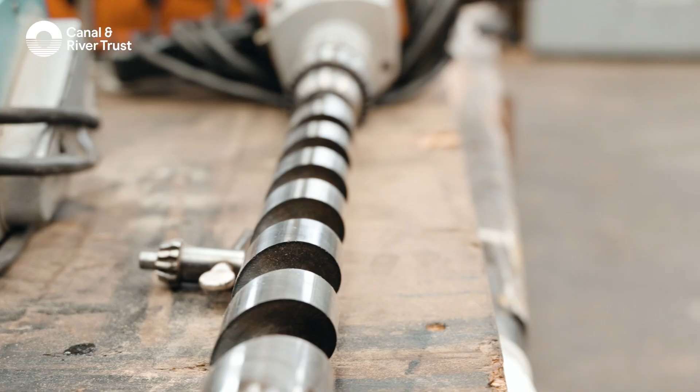Hello, I'm Simon Turner. I'm the National Workshop Manager for Canal & River Trust. I'd like to welcome you to Bradley Workshop here in the West Midlands. This is one of the two sites that we have where we make lock gates for the Canal & River Trust, with the other one being Stanley Ferry in Wakefield in Yorkshire. What I'd like to do is take you through a tour of how lock gates are made, the processes, the tools, the equipment and everything else involved.

So every year the Canal & River Trust will change up to 150 lock gate leaves. That process will start 18 months in advance, where we identify which gates need to be changed. The next steps will be lock gate technicians will go out to each site and take measurements and surveys of those lock gates to understand requirements.

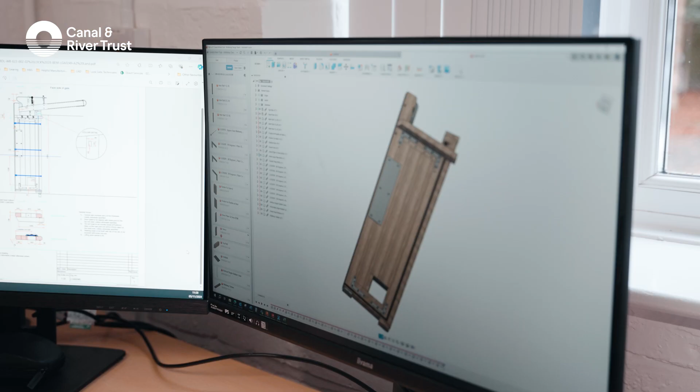After that, they'll be transferred into the drawing department, where accurate detailed plans are produced, which allows the gates to be made. Once that has happened, we produce a cutting list. The cutting list is of the timber that is required to make the gates. So we'll take you through now and show you that process.

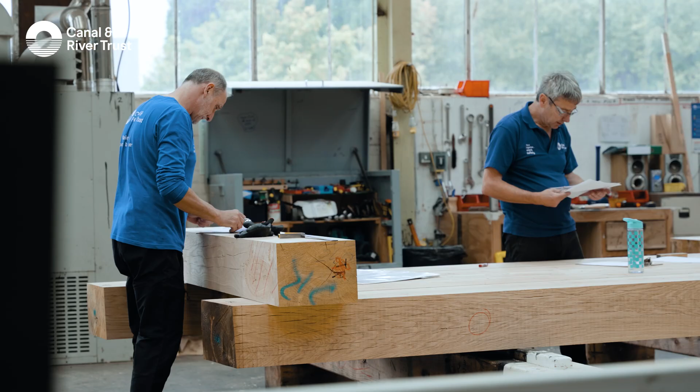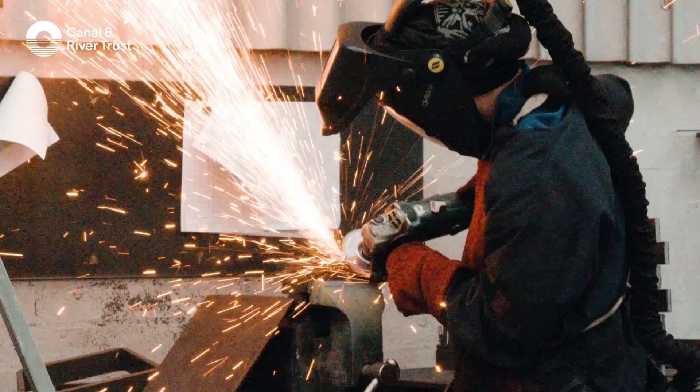So the first step of the process, really the most important part, is us carrying out and doing the surveys of the lock gates. Now the purpose of that is for us to check measurements against existing drawings, but things have changed over 25 to 30 years. So we don't just want to rely on that old drawing, we want to go and check on site. So they'll use the drawing, they'll use how the gate sits, and they will take new measurements to come up with a survey. As you can see, it's quite technical.

The tools that they'll use to do this are really basic, and the reason we do it this way is it reduces, first of all, the cost of dewatering the lock, but also the impact on our customers. So if you can imagine, to do it in the dry, we'd have to dewater the lock, huge cost, a whole set of stoppages. We'd be doubling the stoppages that we'd need to carry out.

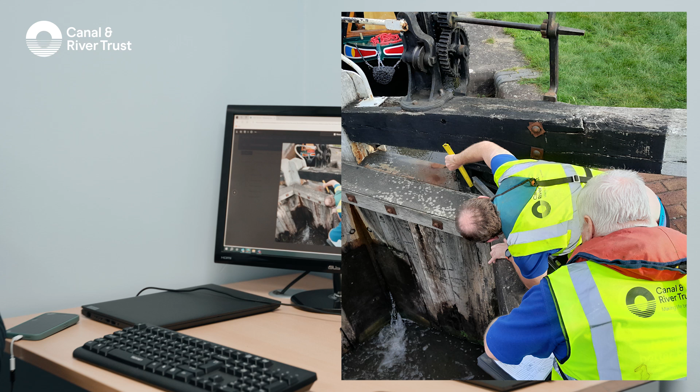So all in all, we have to take over 30 separate measurements for each lock gate leaf. That would include the collar hole, the length of the balance beam, the angle of the mitre gates, lots and lots of different measurements that are required. So we want to move that forward, we want to make it safer, we want to make it quicker, we want to make it more accurate.

So we've just invested in laser pointing equipment. This enables us to point a laser at a set point on the gate and to the next point and take accurate measurements and accurate angles. All of that information then can be transferred into the computer aided design packages, the CAD packages, that enables us to more accurately and safely take the measurements that are required. So this moving forward is new technology. This investment in the technology is absolutely crucial to us moving forward in lock gate production.

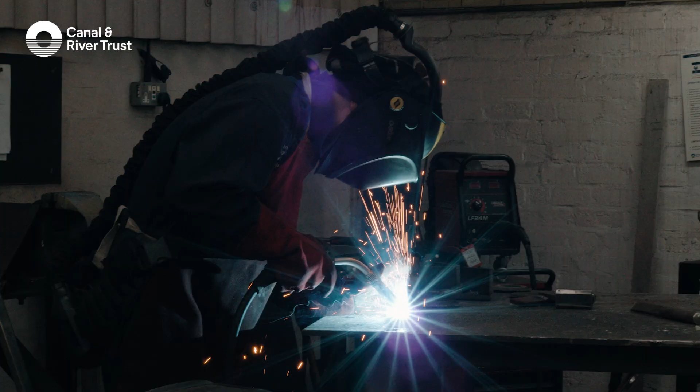Okay, so this is the drawing office at Bradley Workshop. So once the site survey has been completed, all of that information comes through to be drawn in CAD. So it's computer aided design. So we have for a long time relied on a 2D CAD approach. So it produces a flat drawing with not a huge amount of information in it, because a lot of the information was in people's heads.

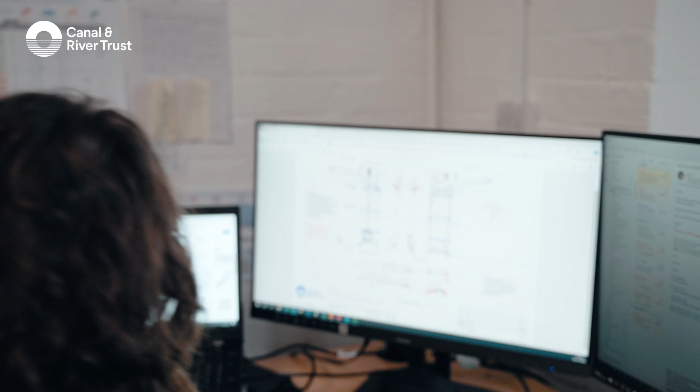And what we want to be able to do is take that out of people's heads and get it down onto a drawing. So as you can see here, this is a typical 2D general arrangement drawing that's being worked on. So this is a lock gate which is on the Worcester and Birmingham Canal.

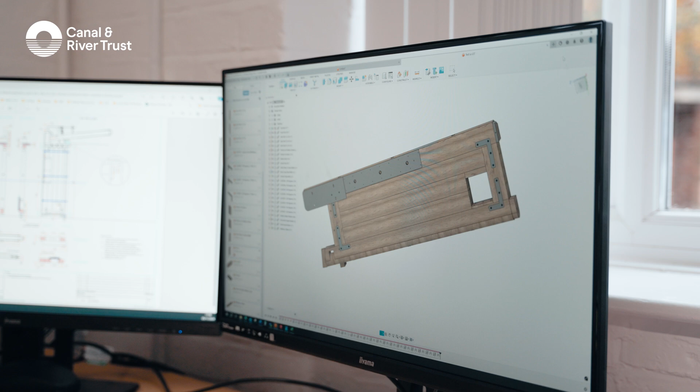But the next step, and where we're moving to now, is 3D design. So this is 3D modelling, and you can see there what we're able to do is take a model of the gate once it's been drawn. We can manipulate it, we can turn it, we can ensure it works, we can ensure that it fits. So obviously gates are made specifically for that lock chamber, so if we get it wrong, it can't go somewhere else.

So all of this is next steps in the process of us moving towards CNC, which is computer numerically controlled production. We've already started some of that with our plasma cutters, which we'll show you a bit later on, but we're also now looking at the next steps for CNC machines for lock gate production. So the guys do a great job, 150 plus lock gate leaves per year that they will have to draw and model and check and design, and if they get it wrong, the gate's wrong, so there's no pressure.

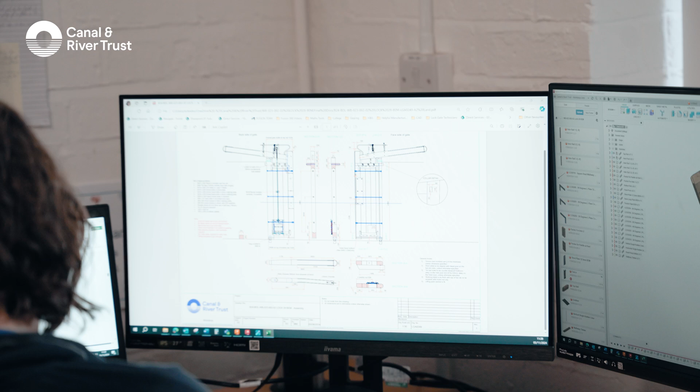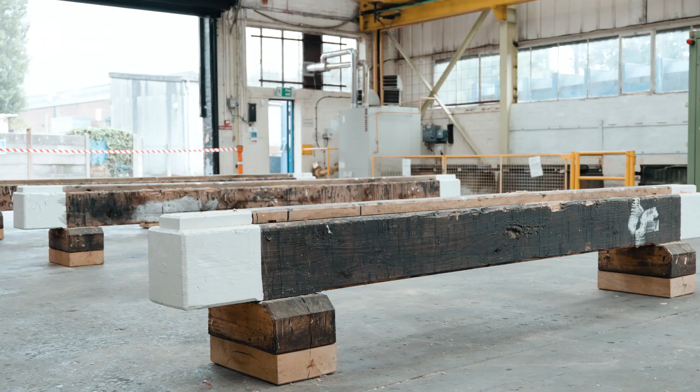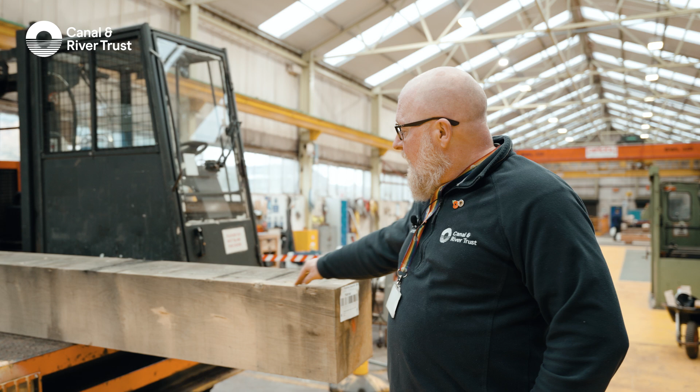So once the drawings are produced and they've moved to the shop floor, that's when the gate production starts. So it starts off with green timber being produced, English oak and Scottish oak coming into the workshop in its rough cut state. So the next step we have to do is to plane the timber. Now we're not planing it to make it smooth as you would like a piece of joinery. It's really to square and true the timber so it works well for the gates.

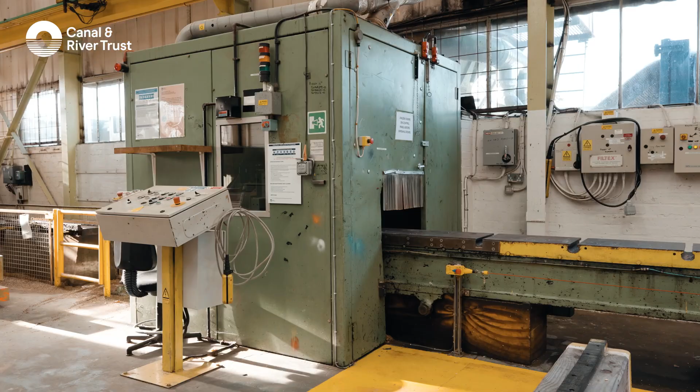So once it's coming into the workshop, it then moves onto the planing machine. So this is a two-sided planing machine. So what that enables it to do is to plane two sides at once, but it's a very old machine and only one of those sides works currently. The timber's loaded onto it and it moves through automatically, multiple passes, taking around about 5 to 10 millimetres off per pass.

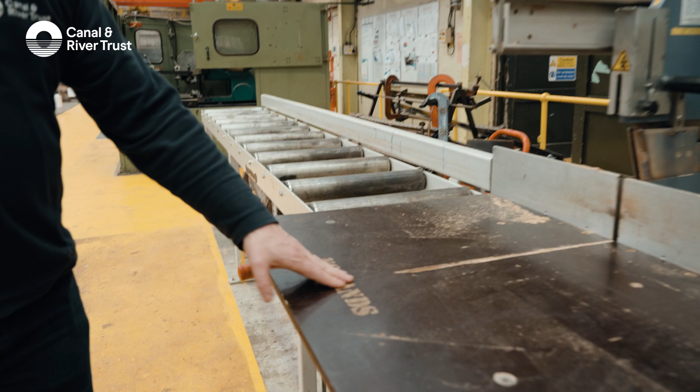So once we've got the timber planed, what we'll do then is move it onto the saw here. So this saw allows the timber to be cut to its length. Big saw, and as you can see, safety is paramount. It says here, no hands, and that doesn't mean people have got no hands, it means you won't have any if you put your hands in this area. But it's a very, very large section saw, hence no hands.

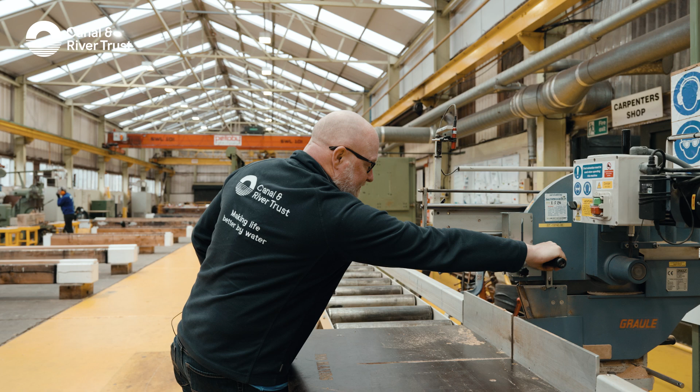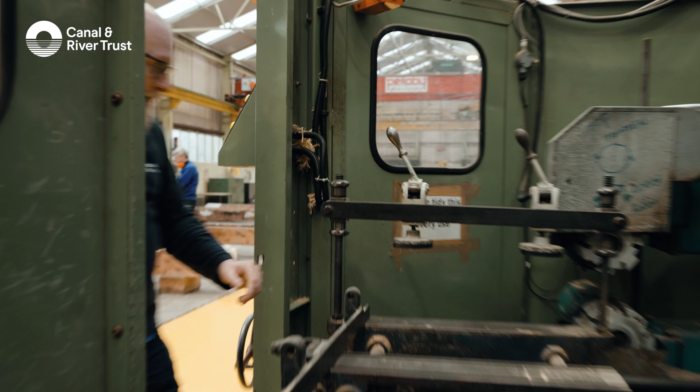So the gates are made in a very simple way. So all of the joints are mortise and tenons. So there's a tenon cut which sits into a mortise. That's the main frame for the gate. So the next step after it's been cut to length is to pass it into the tenoning machine. So this is the tenon machine before it's been loaded. And if you have a look through there, we have two cutters, top and bottom. The timber sits on here, and these two cutters cut and form the tenon. Very, very efficient way of doing it.

So once we've done the tenoning, the next step is to cut the mortises. So the machines we have for that, which we'll move over to now, date back to the 1950s. So we've definitely had our money's worth out of that machine. So I'll show you how that works. Steve.

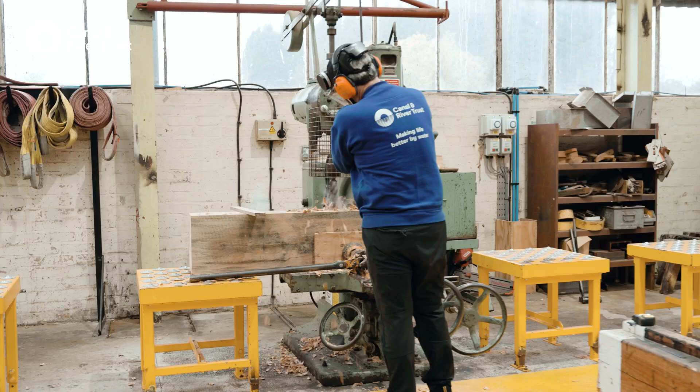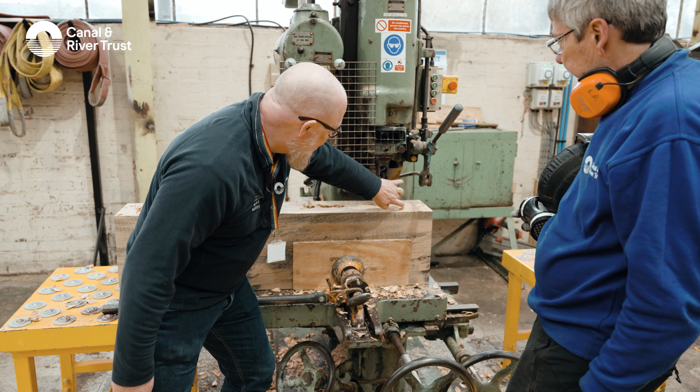So first of all, we drill holes in the timber. So this takes out the bulk of the material. As you can see, it's hand operated. So once the holes have been drilled, the next step will be for the mortise chisel to form the square. So it drills a square hole. As you can see here, there's a four-sided chisel that's very sharp with an auger in the middle. The auger takes out the bulk of the timber and the chisel squares up the sides.

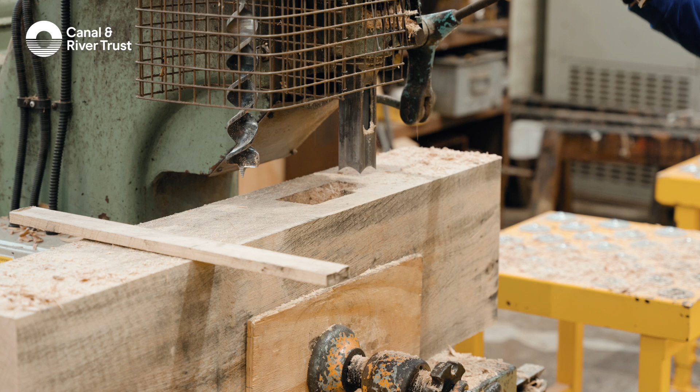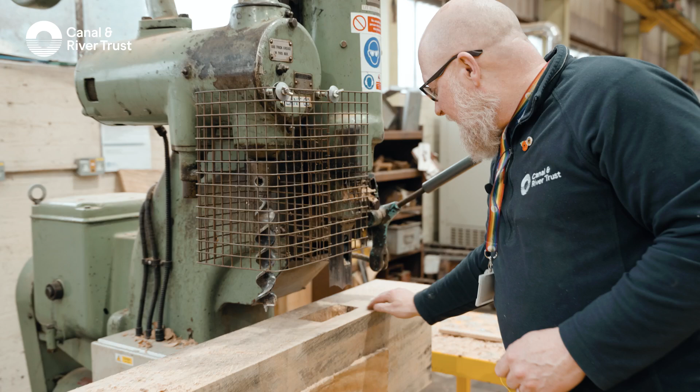So as you can see, we've drilled a square hole. And you can feel the wet in the timber because it's green oak, so it's not dried out. Not excessively wet, this one, but some of them you can actually squeeze out water. There's that much moisture involved, but it has to be green oak. Kiln dried oak would be too expensive and impossible to achieve.

So this is the end of sort of the machining section. So once this is done, and there could be up to 25 of those joints per lock gate, you can imagine the time that it takes doing it the way that we're doing it. But once that's done, we're then moving to the assembly side. And there's quite a bit of finesse there, even though with the big heavy joints and heavy timbers, there's a lot of finesse. So I'll show you some of the tools that we use from the assembly part of the process. Because we're using such big timber, we have to use big tools.

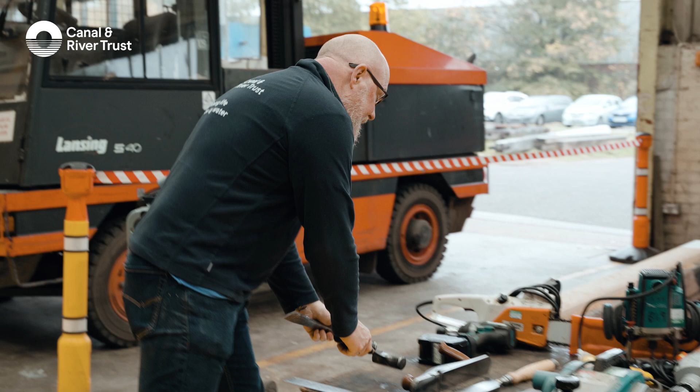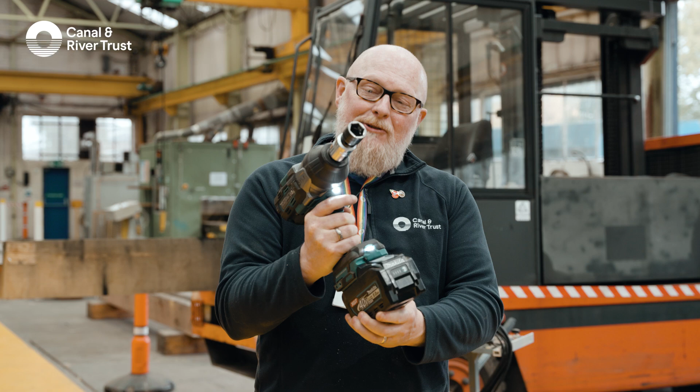Crocodile Dundee, that's a chisel. All right? And we don't use mallets. We use lump hammers. Some of the other tools we have made because you can't buy them. Again, very big chisels because it takes a lot of effort on there. We're moving very much now into battery tools. So these are sort of 40-volt impact drivers. These are very powerful. They're used to bolt all of the joints and all of the plates together onto the gate.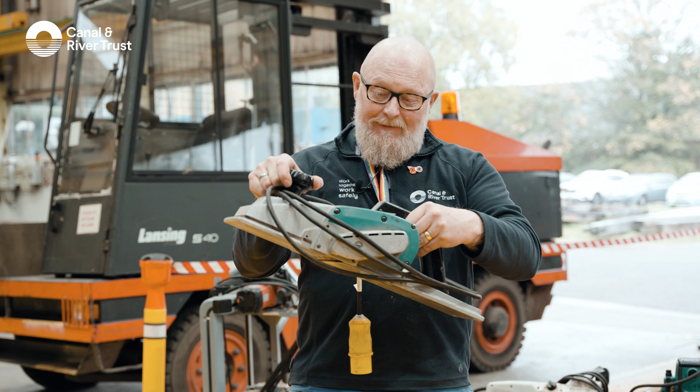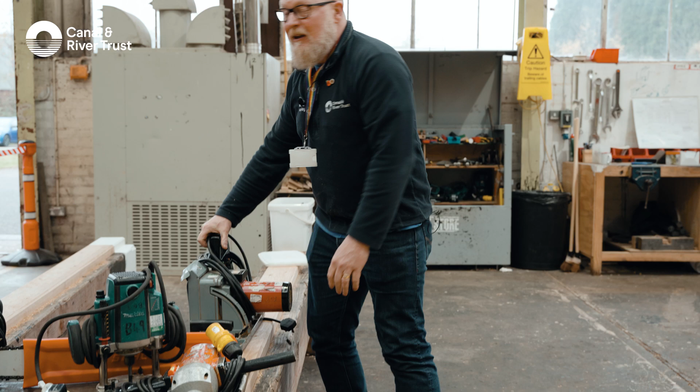We have very large planers. Again, not the sort of thing you'd pick up from Screwfix. It's quite specialist equipment. Big drills. And some very, very specialist pieces of equipment. So this is a chainsaw, jigsaw chainsaw. So very, very specialised equipment, very expensive equipment. These go for around about £6,000 for that machine, and that's used to cut the bulk timbers to their lengths as well. Big chainsaws, very large, and everything has to be electric or battery powered because we're inside the workshop.

But there's also an amount of finesse. These are beautiful planes, used specifically for forming across the tenons. So the handle, you can see, is offset to one side, and basically has to stop you from punching the side of the timber as you go through. So there's an amount of finesse involved as well. The tools that we use are extensive. I would put it at £100,000 worth at each workshop of tools that we need to do the job and make the gates. So quite a lot of money involved in doing that.

A lot of the machinery you see in the workshop is old. It dates back to the 1950s. We've had our money's worth. But we are at a point now of needing investment, and the trust is looking into that now to move into CNC machinery. And all of what we're doing is gearing towards that next step. So it's kind of an evolution. We've gone from hand tools to steam powered tools to electric tools. Next step is CNC tools.

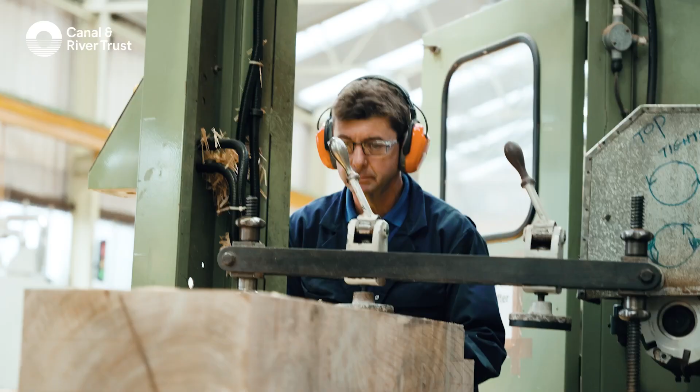The gate components, there are huge amounts of different pieces that need to go together to make the gate. So not just the timber, there is gearing, there is components, there is brackets. All of these things are required. So I'll take you to the stores, show you just some of the examples of the different sizes and pieces that we have to use. A very well kept stores, as you can see.

So every gate is the same in how it operates. So it has a top and bottom hinge. So the hinges are very straightforward. So this is off a BCN gate. So this is the pintle. This is set into the bottom of the heel. This is the cup, which is set into the bottom of the lock. The pintle sits in and it spins.

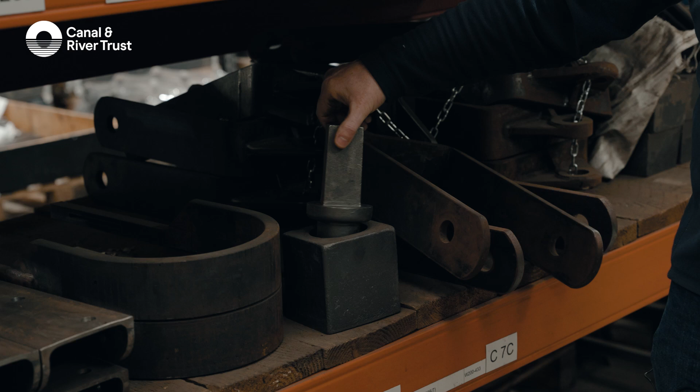Very straightforward. Where it becomes complicated is different canals have different styles, and it's part of the uniqueness of each canal stretch that we ensure that all of that is kept the same. Also from a cost point of view, if we were to try to standardise it, we'd have to do a lot of structural work to the lock chambers. It would cost us a lot more money. But some of the examples of the different ones that we have here.

So this, for example, this is off the Wigan flight, and it is heavy, I do apologise. But that is set into the bottom of the heel. And the cup is sat into the bottom of the canal. Here, a different arrangement. This is Worcester and Birmingham.

That is set into the heel by the joiners. And this section sits into the bottom of the canal. So whilst they're all the same, they're all different. And each canal is unique in the parts that it would require. Some of the bigger ones we have here, the Trent and Mersey. So these are really the larger gates, as you can see, exactly the same principles.

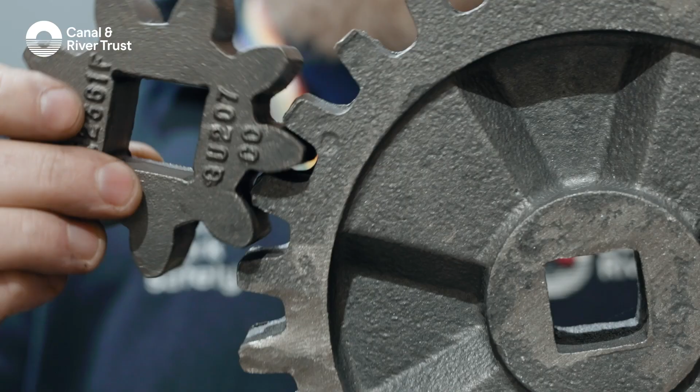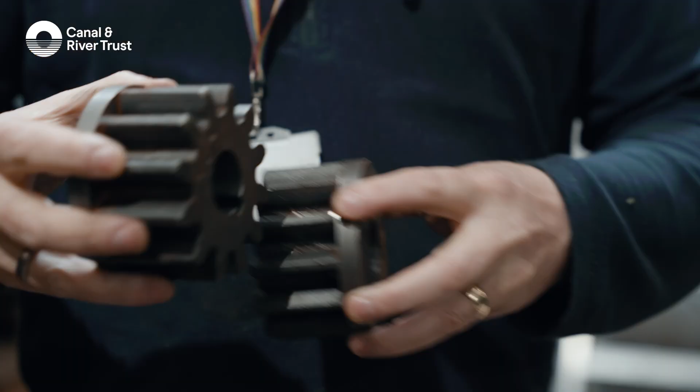So the other important aspect around the lock gate production is the gearing. So similar to the hinge arrangements, the gearing is unique to different canals. So here we have Trent and Mersey style, and over on this wall is the BCN style, and we have lots of in-betweens. Some of that gearing does transfer from different canals. So Trent and Mersey gearing becomes more of a common type gearing. BCN obviously across the whole of the BCN. But still a lot of different parts that need to be put together to enable the gearing to be worked.

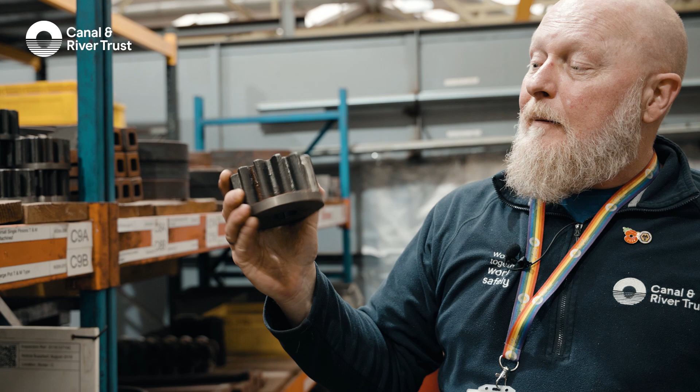These are all cast, they're all cast parts. And they tend to last the life of the gate, but some of these components will wear and we'll change them. And we have a process of recycling gearing that can be recycled for use on new gates to reduce our cost and impact. The racks, so here we have a rack mechanism which enables the paddles to go up and down, in effect, is what they will do.

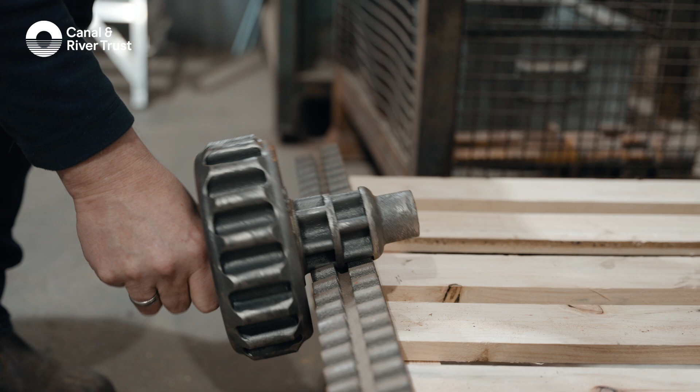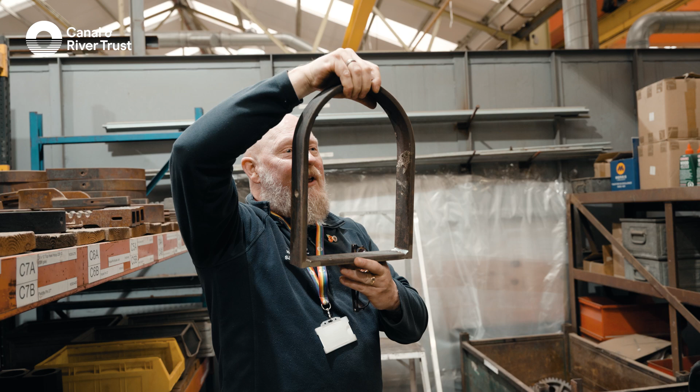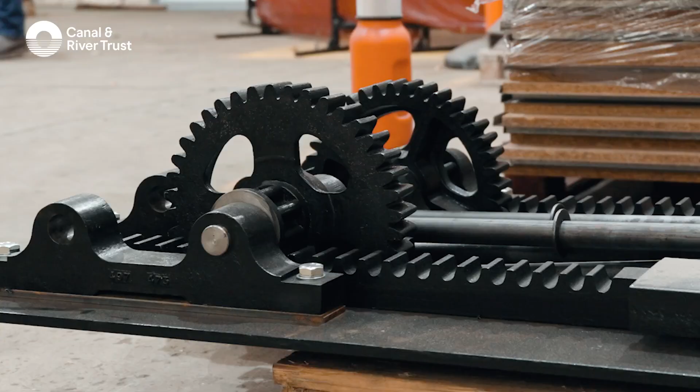And we also have reinforcing parts which are produced in-house. So these are around the bottom of the heels to protect them and to stop them from splitting. So lots of different parts that are required. And if you follow me around, here's one we prepared earlier. So here's a set of completed gearing. As you can see, the different cogs, the racks, the brackets, the plates, all that are required to operate the paddles on the locks. So everything that we see around steel plating here is done in-house, produced by our teams.

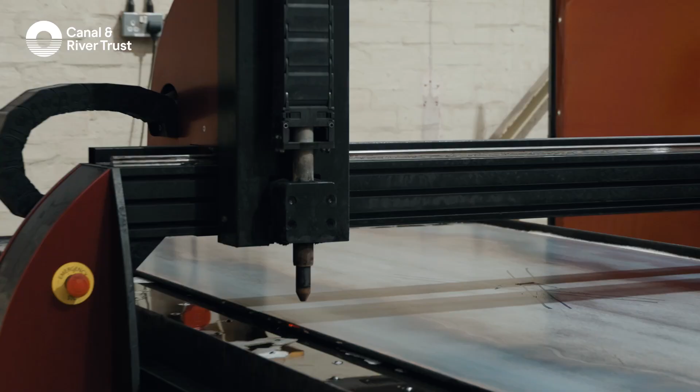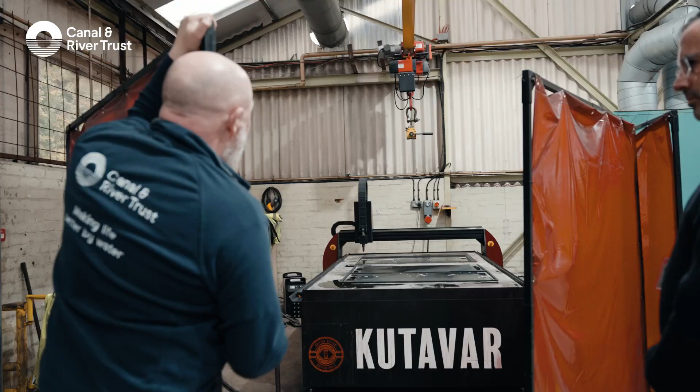And a lot of that work is done on our plasma machine. The plasma machine is a machine that is CNC controlled. So this is an investment the Trust made around 12 months ago. So a lot of the equipment and parts that we previously bought in, we're now able to produce in-house. So as we said, this is a plasma cutter. So it uses compressed air and electricity to form the plasma, which then does the cutting.

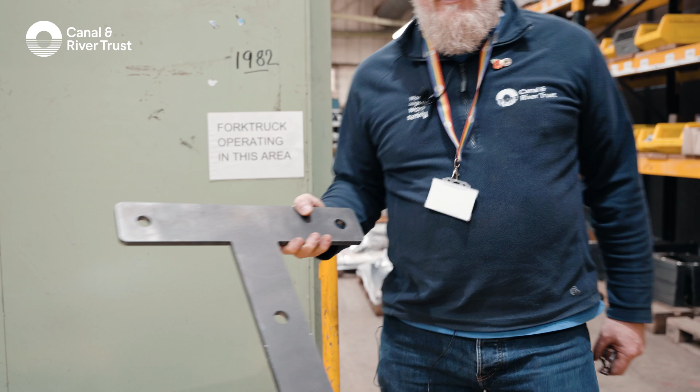So some of the things that we will produce are these fender plates. So all of those have been cut. Previously we would have had to have bought them in or spent a lot of time drilling all of the holes. But the main reason is to produce L's and T brackets. So these brackets are there to reinforce the mortise and tenon joints, and there's a pair on each joint.

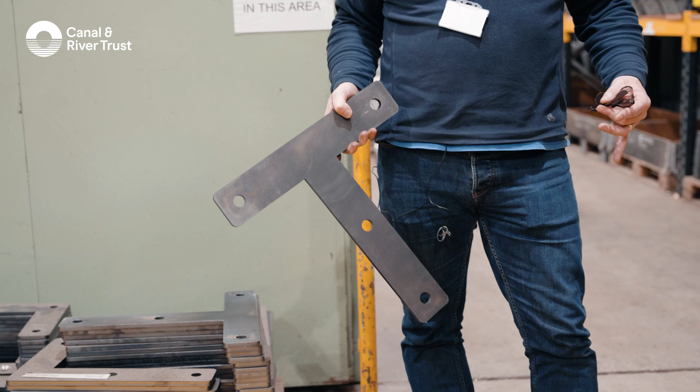So the minimum we would have is 6 sets on a small gate, and previously we were paying around £60 each set. Producing them in-house we can do for £30. So we'll pay off the machine in 12 months, and then all of those savings will transfer forward. So we have one machine. It produces parts for this workshop and for Stanley Ferry in Yorkshire.

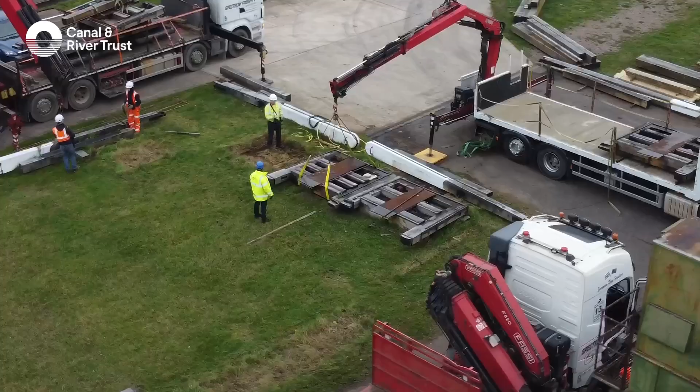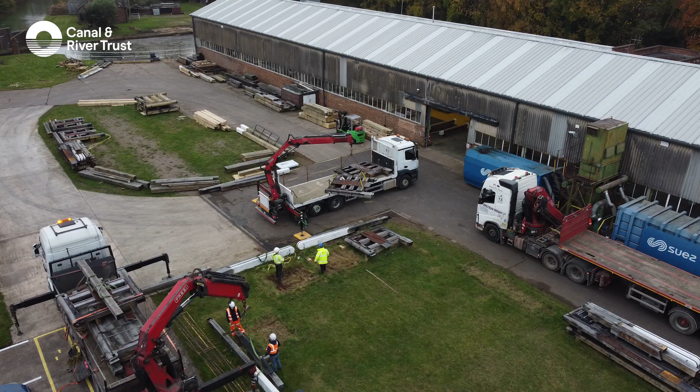So once the gates are completed, they're stored out on the yard and kept wet and watered to stop them from drying out and twisting, especially in hot weather conditions. Once the gates are ready to be installed, wagons will be sent to the workshop and they will be loaded with the lock gates, the lock beams, the gearing, all of the components required to install the lock gate.

The whole process of making the lock gates, as you can see, is quite complicated and expensive. So basic lock gates will start at around £16,000 to make, up to large river gates that will be in excess of £100,000. So without the lock gates being installed and changed on a regular basis, canals would close. So it's a very key and important part of the work that the Canal and River Trust does.